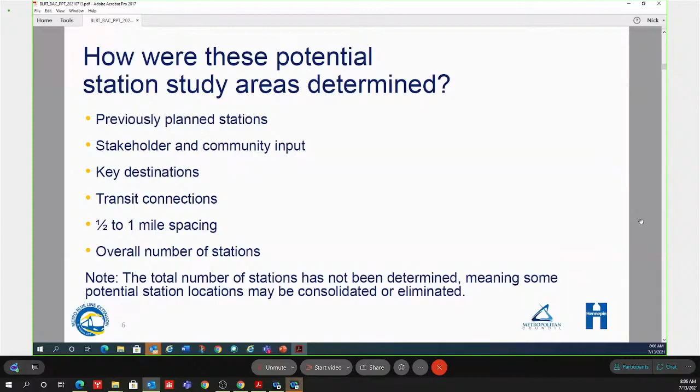We looked at spacing - can't have stations too close. This isn't necessarily a local route, so we don't want stations one block apart. At the same time, we don't want stations more than a mile apart. It's not a commuter rail line either; it's meant to serve all the areas along it. So there isn't a magic number to the number of stations - we don't have a set number yet. It'll all be determined by how we utilize the New Starts guidance to get the maximum ridership and the most beneficial travel time by setting our station configurations and where we'll put them.

So I'll run through a little bit about where we believe stations should go, and certainly take any feedback on these topics as we go forward. On the north end of the alignment up in Brooklyn Park, where we're not influenced by the Burlington Northern Railroad and where we're proposing to run LRT on West Broadway as previously designed, we're recommending that the previously developed four station areas - at Oak Grove Parkway up on the north end, at 93rd Avenue, 85th Avenue, and Brooklyn Boulevard - all continue to be part of the route. The spacing is good for these.

Each of these serves a little bit of a different and distinct demographic. Around Brooklyn Boulevard we've got a lot of shopping areas and housing areas right in that area, plus east-west bus routes on Brooklyn Boulevard as well. On 85th, we've got some east-west routes. We also serve North Hennepin Community College, Maplebrook Townhomes, the Hennepin County Library, the proposed Center for Arts, and potentially some additional housing up in that area. That's a very robust intersection for a station.

Up at 93rd, we've got a number of hotels in close proximity. We've also got a number of major businesses like Takeda and others who have located up there to try to pull an employee base with a station connection. And of course, the north end of the line, or beginning of the line, at Oak Grove Parkway identifies the Target North Campus and an entire redevelopment area up there, as well as a fairly significant park and ride. So we propose those stations to stay the same in their same location - a lot of the design work around those is done.

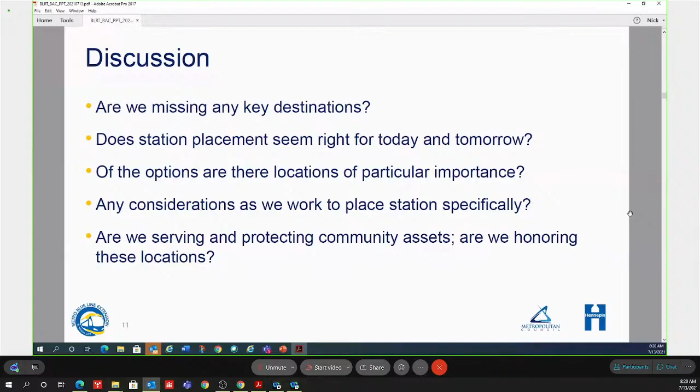Nick, can you go back to the Brooklyn Park slide, please? So it looks like you've narrowed these down to pretty much these locations. Is this pretty well set in your mind? Yes, it is. These 4 spots were locations identified in the long-ago process, like we're doing right now. These 4 were advanced with a lot of station area planning by the city of Brooklyn Park and adjacent communities, and the designs and configurations of these stations and station areas are really completed, so yes, we would propose that these are set.

Is there anybody from Brooklyn Park that has any comments on those sites? It sounds like the city's all good with it, and surrounding communities, and there really isn't any angst about it.

Not displacing much on any of those station locations, it doesn't seem like, because there's just a lot of space as you go up on West Broadway. I think it does create a little bit of a walk from the 694 area up to the Brooklyn Boulevard station, but I don't think there's a better solution closer to 694.

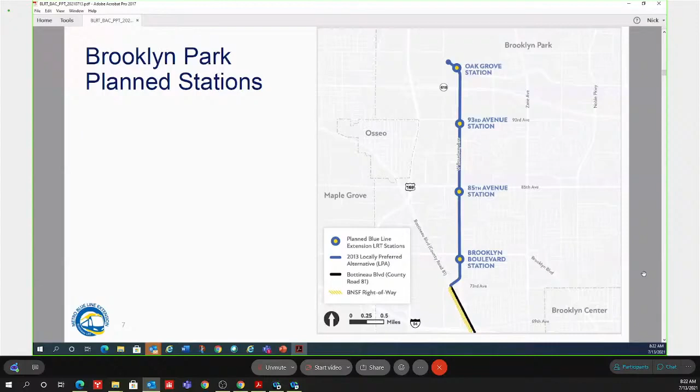Thanks, Chair Ryan, that's correct. As you may know, we're completely reconstructing West Broadway up in this area if we're building LRT, and these stations will all be center platform stations in West Broadway. You're right, the right-of-way acquisition, from a total property acquisition standpoint, is very minimal, if not at all, throughout this entire length. That's correct.

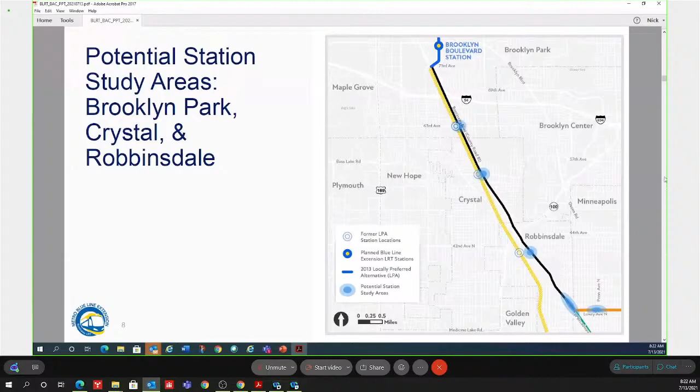Anyone have any other questions? All right.

We can move on to number 4, LRT visualizations. Go ahead, Nick.

Good morning, everybody. I want to go through some LRT visualizations. These were prepared to help people see what the concepts were, how LRT would fit within the routes being evaluated right now, so the route options. What we have in this presentation are some representative routes along the alignment. We've put together a whole library of these, and as we go out to public meetings, we'll have boards and visuals and handouts with these in place, more of them in more locations, but for this meeting, so we don't bring 80 slides, we figured we'll do some typical sections along the corridor and discuss them.

Let's start up in Brooklyn Park. As Dan just mentioned, the Brooklyn Park design considerations are at 90% in that area. So 4 out of the 5 stations along West Broadway, we would propose to keep those in the same location that we have designed. We're in pretty good shape there. The 5th station is the one at 63rd. We'll analyze how that fits in there, but we're still proposing to have a station at 63rd, connecting to the park and ride in that location. That's probably the one closest to 694-94, about a quarter mile south of that intersection.

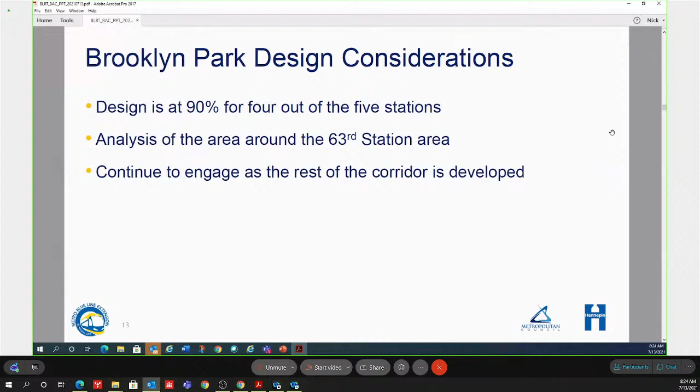So we feel that this is a really robust location for a station, and we've worked diligently to make sure we have pedestrian access to this station safe, both to the station and to get across the roadway. We've enhanced that with the station design and road design, narrowing those lanes down from where they are today, so pedestrian conflicts with traffic get reduced, that distance does.

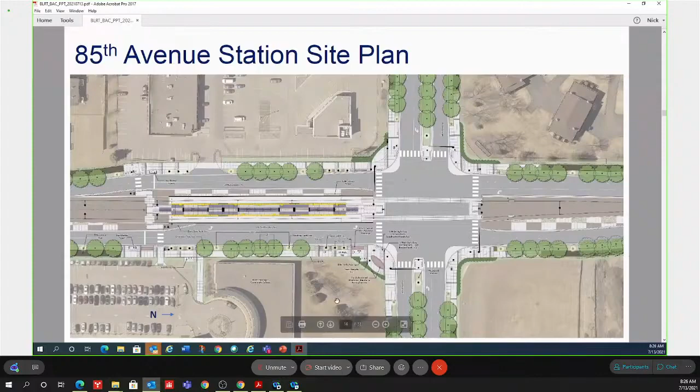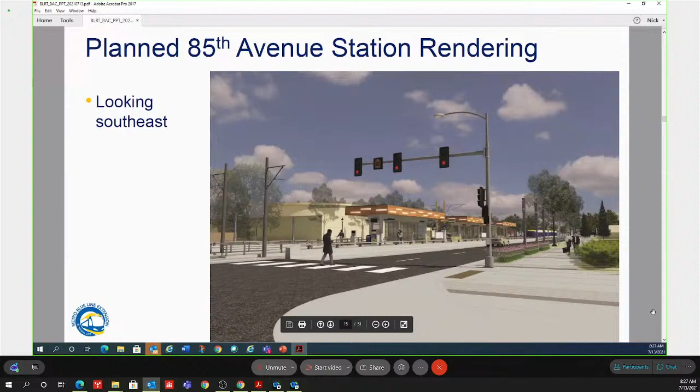Here are some renderings we put together for those stations. Each station footprint is the same as the design now for Brooklyn Boulevard, but we tried to make the facade, the architecture of it, blend in a little more with the area. You can see there's a darker tan or light brown facade that would match the character of the school and surrounding businesses, and that's how a station area would look here in Brooklyn Park at 85th.

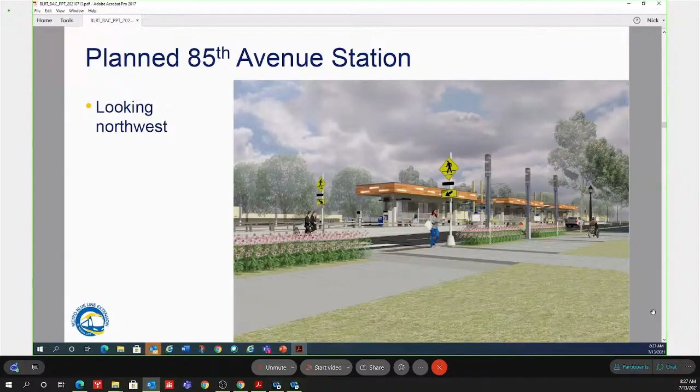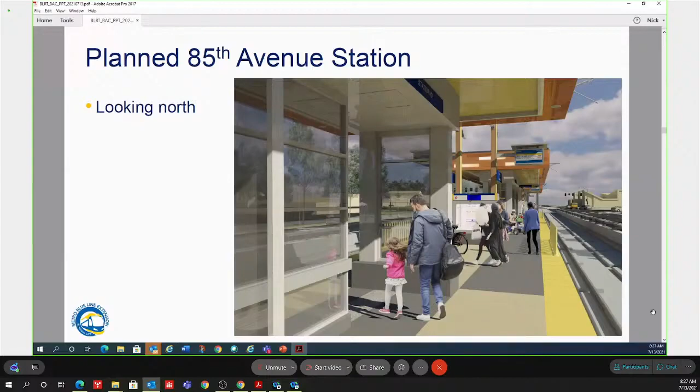And another direction here, this is looking at those pedestrian crossings at that secondary crossing to the south of 85th. And then just a photo of what the station platform looks like, with the shelters, signage, and some ticket vending on that platform.

So I'm going to move down to Crystal unless there's any questions or discussions on the Brooklyn Park area.

In Crystal, we want to confirm there, as we've rolled out the routes, we've identified County Road 81 as really being our route option through Crystal and through Robbinsdale. So we want to confirm that center running at grade on County Road 81 works within this area. In the Crystal area existing, there's 6 lanes of traffic on County Road 81, three lanes each direction. With the light rail going in, we would reduce those lanes down to 4 lanes, 2 lanes in each direction, with the center running LRT going through there.

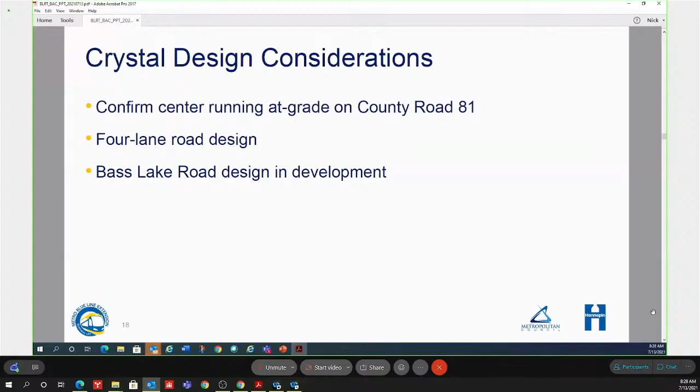And then as Dan pointed out in our station presentation, the Bass Lake Road design would be in development. We'd look at how that station area and access to it would work. Also, Bass Lake Road, with the high volumes through there, we need to pay attention to how the traffic operates with County Road 81 and a reduction in lanes.

So I'm going to flip here and show that this is the proposed center running through this area, and flip back a little bit to show that with the center running, reducing it to 4 lanes, we pretty much fit within that existing curb line out there. The impacts are pretty light to the existing frontage roads through that area. We were able to maintain robust pedestrian trails on each side, maintain the frontage roads, and keep the 4 lanes of traffic with the light rail in here.

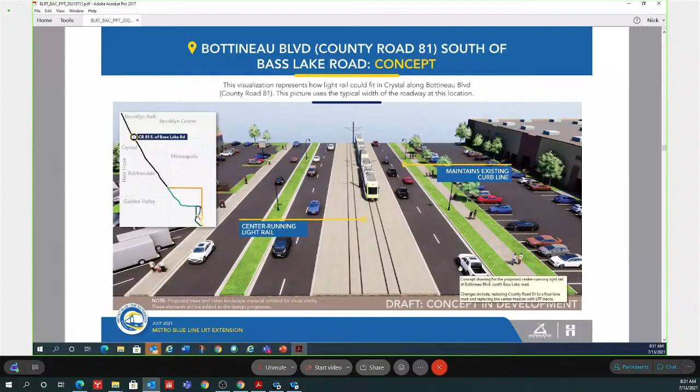Now all of these are really to show in context how things fit through here as we go through design and work with our project partners, getting more into design next year. We'll start looking at how things fit, like vegetation and plantings. What you also don't see in this view are any turn lanes, left turn lanes through here—this is just the guideway we're seeing. So there's a lot of work we need to do, but this is really in context of how things fit in general along the alignment.

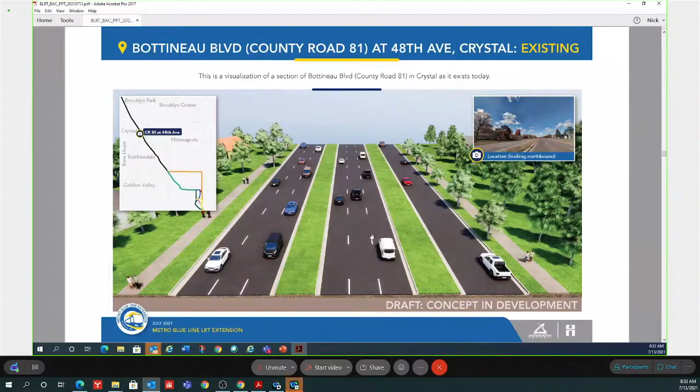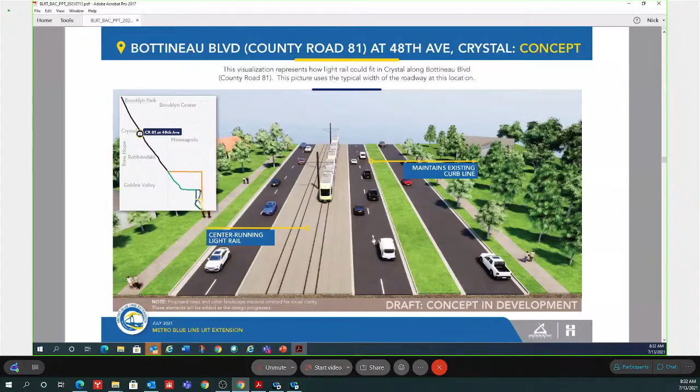So I'm going to move south here in Crystal, down by 48th Avenue, a little bit farther south from Bass Lake Road. This is more of a residential area, so you can see on the east side, frontage road along 81, residential on both sides. There's a trail on both sides in this area, 6 lanes of traffic, a pretty good sized median there and boulevards. Again, as we flip down through here with the center running light rail, we were able to maintain that existing curb line area, so we fit within that roadway footprint and maintain the pedestrian trails and frontage roads.

Any questions on Crystal? Yes, I have a question.

Yes, Candace. This is Candace Otha. I'm wondering how it would impact the actual intersection of Bass Lake and County 81. That's been an ongoing issue with the BNSF alignment. How would this be different from that?

We will have some layouts here as we start going out to the public, but we can maintain the existing intersection movements on Bass Lake Road with an at-grade option. We know that with the lane reduction there is some level of service we need to evaluate in a built condition, so we're looking at what our options are there in that intersection. We have some work to do to maximize the level of service and traffic through that intersection—we can fit an intersection at grade, but we are looking at some other options in that area at this time. Some work to do on that.

I have to say this is a big improvement from what BNSF was, in my opinion, and I've been around light rail for many years. I like, to a certain extent, the narrowing if it can handle the traffic congestion we've been having that caused it to go to 3 lanes in each direction in the first place. Agreed.

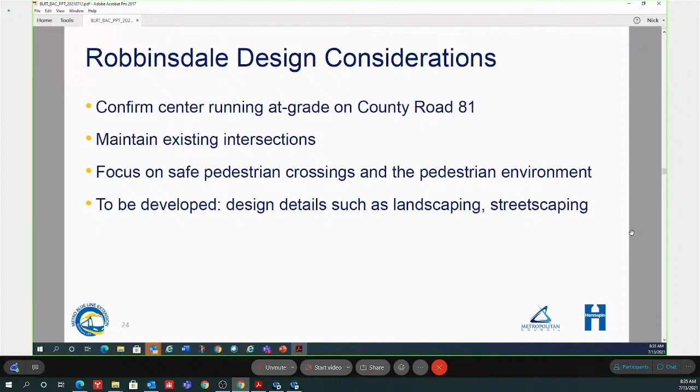We can still maintain the capacity that's needed through there and what's needed for that area. So again, on these, we need to develop and work with the city on things such as landscaping and streetscaping, fine tune the designs, fine tune how things fit within there and what the impacts are to adjacent properties and how we fit within the right of way.

So I'm going to flip to the center running at grade proposed alignment, and you can see that we maintain that wall along town center through here. We want to make sure as we're going through design that we focus on the pedestrian experience, to make sure it's convenient and safe to get around this downtown area to light rail stations across the roadway.

The one thing you can see, if I flip back a little bit here, is that the road does widen out in this location. So we know that this would impact the Robbins Center parking lot. Some stalls would be eliminated with this alignment, and what we would work on is mitigation with the ownership there for the loss of parking through this area.

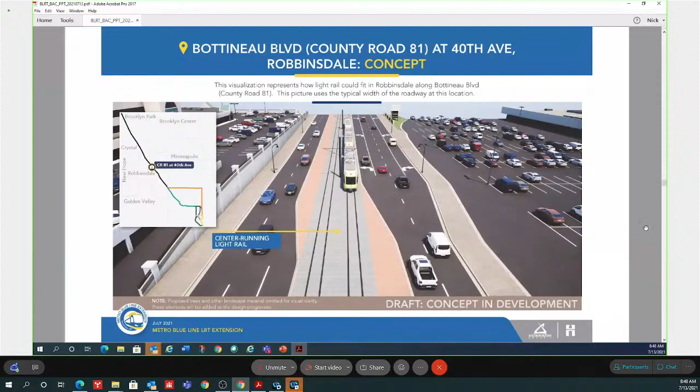So again, we're down here by North Memorial, looking at how center running fits through here, and as in all of these renderings, we'll have to really pay attention as we get to intersections and how we handle the turning movements, and that will affect the alignments and space needed for these alignments.

Any other Robbinsdale questions? I had a question, Nick. Sure. For the station locations, what would be done to mitigate the impact of the frontage roads on pedestrian access to the stations?

Well, as far as mitigation, the first thing would be: are we impacting that frontage road? We'll try to work on a design that doesn't impact it, but if we do, we'll have to figure out how we handle the traffic along there.

Sorry, just to clarify my question. I was thinking about the frontage road adding an extra barrier for people walking to access the LRT station. So in this slide, the frontage road adds a barrier between 81 and the area.

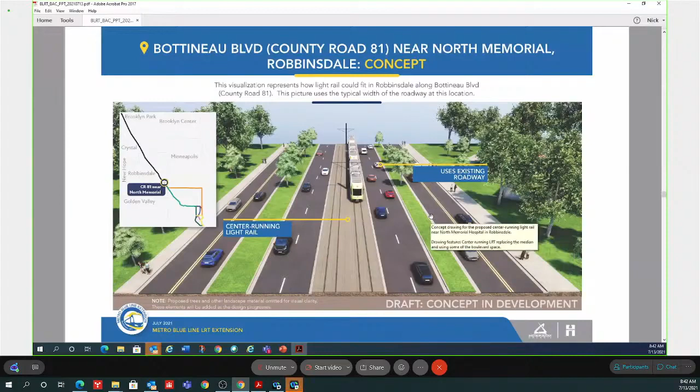All right, I'm going to move into Minneapolis, a little bit more for consideration. We have the two route options: the West Broadway, Washington Avenue route, or the Lowry Washington Avenue and West Broadway route. One of the main things here is we need to evaluate the links that go into each of those options, that spaghetti map we've seen at the bottom, getting us out of downtown and up to either one of these routes.

We do know there's going to be parking impacts in Minneapolis with either route alignment. We're evaluating what the parking impacts are and coming up with a toolbox of mitigations to deal with them. For instance, district parking, do we look at side street options, do we evaluate specific properties? There's a whole toolbox, and we want to make sure we're coming up with options that best serve the communities in these locations. That's a key thing we're looking at, and we know it's a concern of business owners and folks in this area.

We also need to evaluate more on the signals, intersections, and turn lanes along there. We're working with the city and the county in these areas. We're going to have workshops to evaluate how we handle intersections, keep necessary turning movements, and make sure intersections are signalized as necessary, evaluating all that.

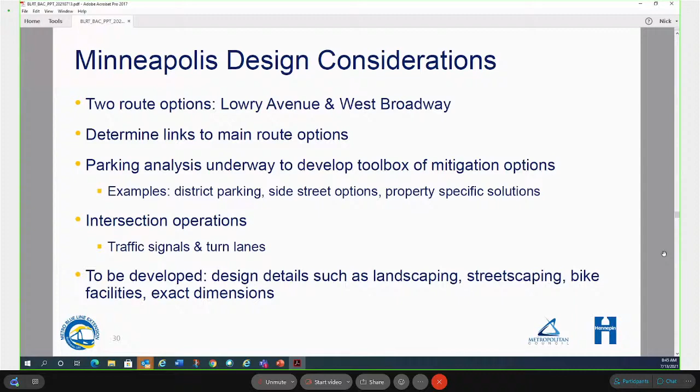I'm just looking here at what workshops - I think one of the questions from Felicia is, yes, some of the initial workshops with the city and county would be more internal on operations. But as we roll these out, we'll be working with the communities, Felicia, through the BAC and CAC, and we'll ask for input and ideas on how folks think things can operate well. I think the initial stab we'll take internally, looking with the owners and operators of those roadways at how things work in that area, and then have those options to bring out to the community.

So this first view here is Lowry Avenue at Newton. This is pretty representative of most of Lowry Avenue, residential with some commercial mixed in here. It's 2 lanes of traffic. There's a wide gutter pan on both sides, about 5 or 6 feet, that's concrete and used as a bikeway through here, with sidewalks on each side and boulevards.

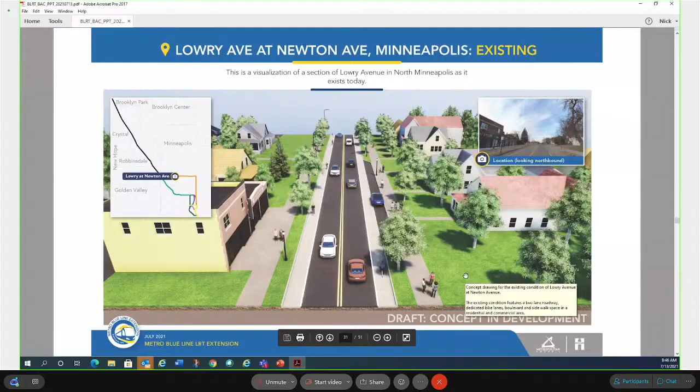I'm going to flip here to the center running option. So you can see as we go down West Broadway or down Lowry, that with the center running, it does widen out this footprint through here, pushing out the sidewalks in these locations within that right of way.

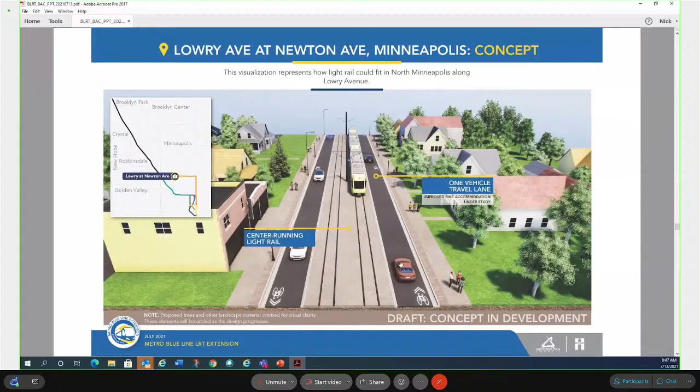This view too, we show the one lane of traffic. Again, we need to work with the city, the county, and reach out to the community about how the best way to allocate this space outside the guideway. In this rendering, we're showing sharrows to share the lane with bikes through this area. Is this the end design? No, there's a lot of work we need to do about how this space is used, and if we continue bikes on this, or work on mitigation and provide different opportunities.

I'm going down to Washington Avenue here and taking a look at it. Just below this box here is 94 on the screen, a little bit more industrial area in this location. There's 2 lanes of traffic each way, with parking on both sides along most of Washington Avenue, and sidewalk on either side. This is how a center running guideway would fit within that Washington Avenue area, reducing this down to 1 lane in each direction. We're showing accommodating some of the left turn lanes, and the potential for providing parking at least on one side through this area and how it fits.

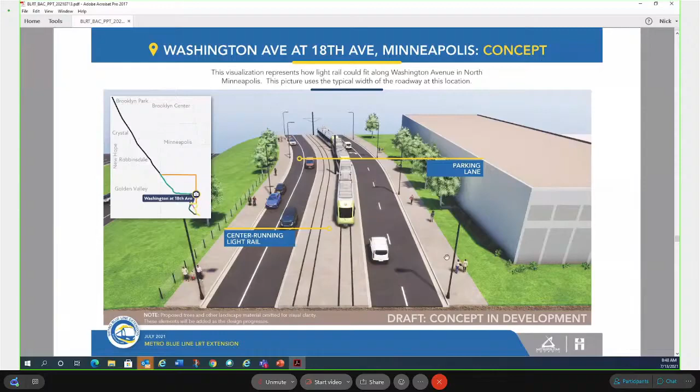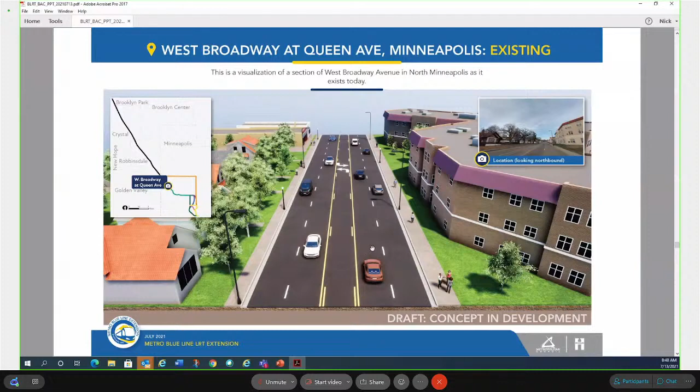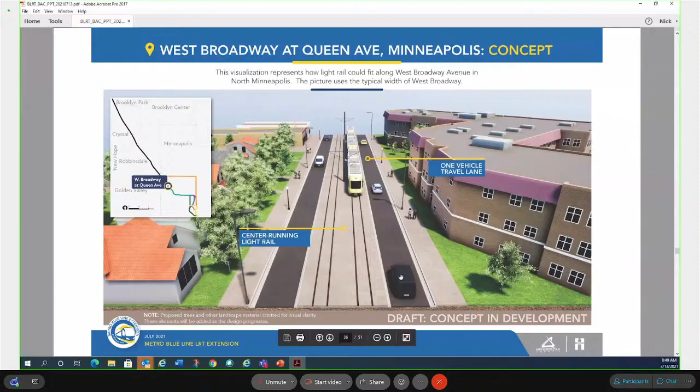I'm going to go over here to West Broadway now, around the Queen Avenue area, where we have single family residential on the southwest side, and a little higher density apartments on the northeast side. 5 lanes of traffic here, 2 lanes each direction with a center turn lane. Sidewalk on either side that's very close to the roadway. This is what it would look like with the center running through here. Obviously, the parking is not available with this, but we maintain the sidewalks on either side, with one lane of traffic in each direction with that center running guideway through here.

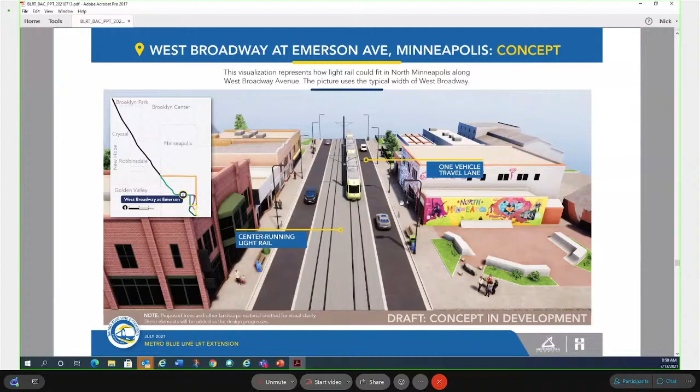With that, I can stop here, and if there's any questions, we do have some other options that have been brought up with our discussion as we've rolled this out - one of them is what does side running look like, and what does an elevated section look like. So we want to roll those out here and discuss those a little bit. But are there questions that are coming up here?

Nick, there's a question or follow up in the chat from Felicia, and maybe I'll start to answer some of it too. It's kind of some of what Nick was mentioning about turn lanes and operations. That is part of the discussion we want to have with the community in July and August. From a perspective too, Metro Transit is not the owner of the roadways, so we have to work with the county and the city when we're doing stuff in communities that we operate in.

So we might run the transit service, but if the county says there's no way you can do this on this roadway, we still have to work some of that out. We often have a lot of technical questions: what's the traffic volume on this roadway, what would happen if we do this? That's some of the stuff we definitely need to do.

But what Nick is saying is that whole operations piece of the roadway is a conversation we need to have a lot with the community. So Nick is busy putting together some of the technical considerations so people can weigh the benefits and impacts of certain solutions and discuss that.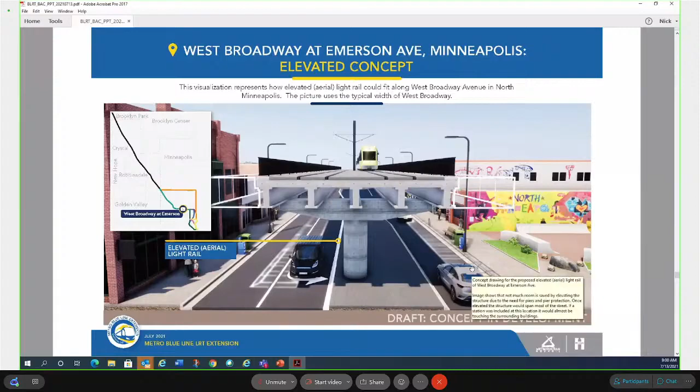Okay, I'm going to slide over here to side running. One of the questions we've had come through is, compared to center running, are there advantages to side running? Instead of splitting the traffic up, maybe it gives a little bit more room to those single lanes and puts the traffic on one side.

This is a graphic, and this could be east side, west side, north side, south side—you could flip-flop this over, and it would be representative along either Broadway or Lowry or other options. But as you see, you start pushing up the guideway to one side.

It does center that train more on one side of the road than the other. But one of the things that we're finding is an issue with the side running, especially in places like Lowry and West Broadway, is the impacts it has to access.

So if there's driveways, alleys, unsignalized intersections, for instance if we had cars coming this way, there's an intersection, we can't just have free right turns to turn at that intersection. That intersection needs to be signalized for those free right turns, so that would hold up traffic. We would need to start putting in right turn lanes, make sure that intersection is completely signalized, and it would cut off intersections that weren't signalized through this area.

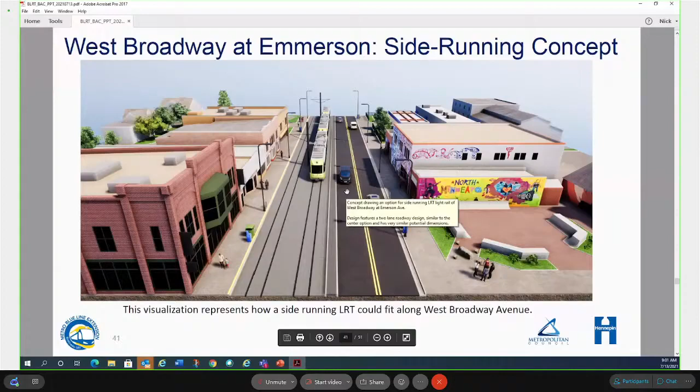It wouldn't offer, for instance in this picture, that free right, right-in right-out turn movement at an unsignalized intersection. So I'm going to flip here to show what the quantified impacts are to that. We did look at West Broadway and Lowry and what the impacts would be with unsignalized intersections.

Was there a question?

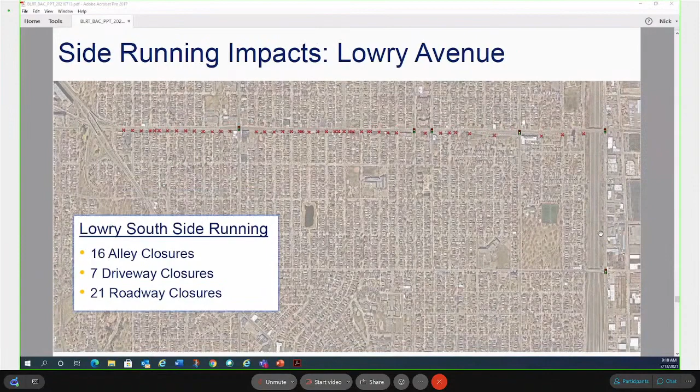That's the challenge, you're right, Ian. That's why looking at visualizations — and I apologize, I was gone for the last 30 minutes at a different meeting — but that's part of the challenge of looking at a visualization saying, well, it works to have LRT running on West Broadway for some of the length. But as they say, sometimes the devil's in the details, and the details are obviously very critical here.

Each individual intersection and where you can put things can make sense. We know that if there's a particularly tight area — as in your previous discussion, Ian — do we move LRT to 21st? Is that a possibility when there's some blocks that are difficult? Do we use an aerial segment for a short stretch in order to squeeze something in? What are the various opportunities there? So this is why we now need to dig just a little bit deeper and continue to move this piece along.

I hope too, with the visuals, it begins to show how things fit together, and then you can start to have some of those conversations a little bit more in depth, because now we're beyond a line on the map.

So we have broader meetings later, but we really want to emphasize that we want continued discussion, especially with the Minneapolis group on some of the specifics, because that's where a lot of the solutions come from, this kind of pull-up-your-sleeves, get-into-the-weeds discussion.